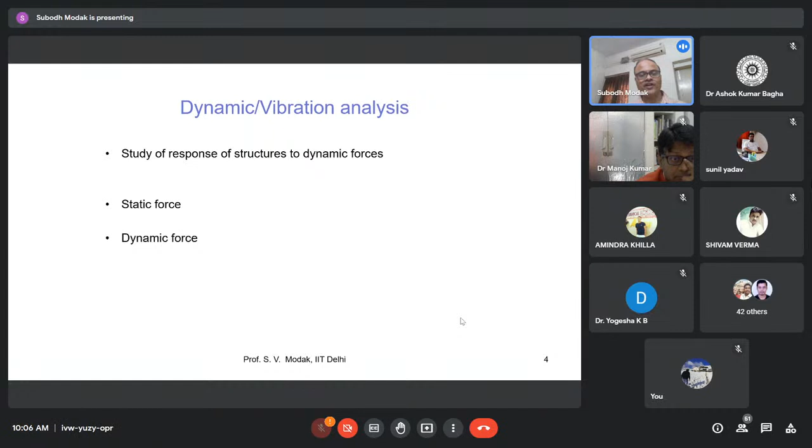But other forces, for example, let us go to the next slide to look at dynamic forces. Different dynamic forces which may act on structures could be due to rotating unbalance. For example, many machines have rotating parts like a motor, an IC engine, a pump, a centrifugal compressor, fans, and so on, with rotating parts like blades. So what happens is there will always be some amount of unbalance present because the center of gravity of the fan or rotating body may not be exactly aligned with the axis of rotation. And because of the difference between these two axes, there would be a centrifugal force that comes into play, which would eventually be transferred to the supporting structure through bearings. Therefore, the supporting structure would be acted upon by unbalanced forces.

This force is of rotating nature because the body is rotating. And therefore, if you look at force in the vertical direction, that force will be continuously varying, because the centrifugal force is rotating and its component would continuously change.

Similarly, there could be reciprocating unbalance. The reciprocating masses, for example in an IC engine, the piston mass is a reciprocating part, and some amount of the mass of the connecting rod basically makes up the reciprocating mass. This reciprocating mass in general cannot be easily completely balanced, and that is then transferred to the supporting structure through bearings, making it an unbalanced force.

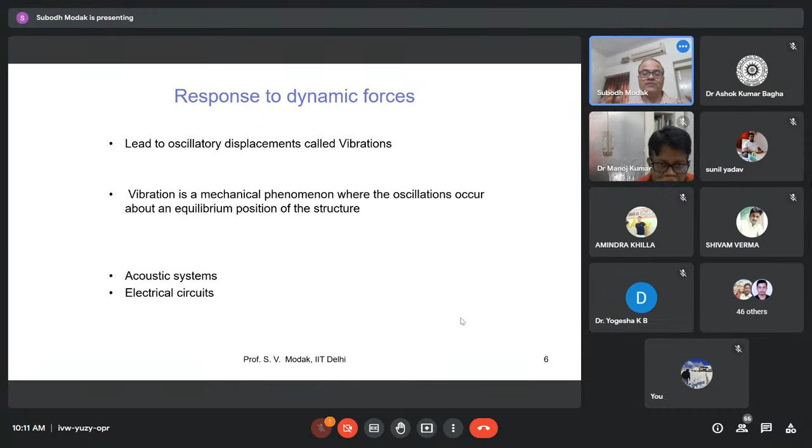So this gives you a brief idea about the different types of vibratory motions. For example, you can have—let me pull out the pointer.

So you can see, for example, an electric motor rotates at a certain RPM, and because of some unbalance, there will always be a rotating unbalanced force. This unbalanced force would be dominant, creating dominant vibration at the frequency of rotation, so it will generally be a harmonic force, and the resulting vibration is a harmonic vibration. If you plot on a time axis x versus t, you would see a curve like this, a sine wave. It's called harmonic vibration.

But if you have a diesel engine, and you put your accelerometer on its surface to measure that vibration and see its waveform, it is likely to look something like this, shown by the green line. This vibration is generally not harmonic, it has multiple harmonics. The fundamental rotatory component will have harmonics of that component. So if the RPM is n, you will have 2n, 3n, 4n frequencies also present in the vibration. That's why the waveform doesn't look like a sine wave, but like a summation of many sine waves. It's called periodic vibration.

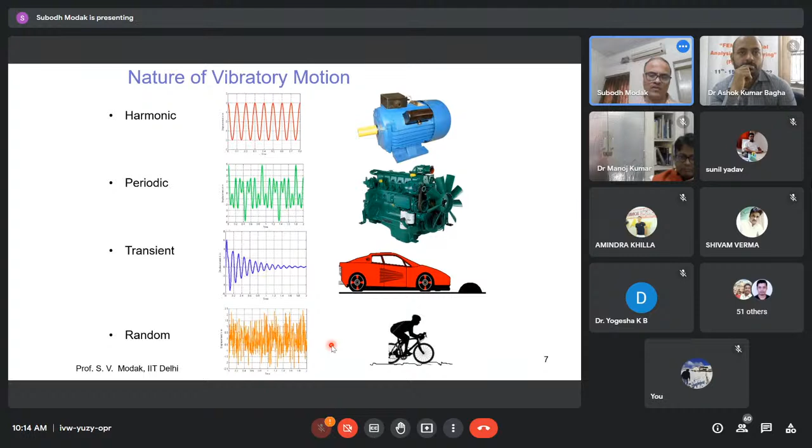So what are the consequences of vibration? If vibrations are there, often they are not desirable, simply because vibration causes an oscillatory displacement, which means there will be strains which occur, and the stresses caused by that will also be oscillatory. And oscillatory stresses cause fatigue. So one important consequence of vibration is fatigue of the material—it is subjected to continuously changing strains and stresses with time, and this causes fatigue. The fatigue life is less than the life without fatigue. If a machine component has no fatigue, it can last for a very long time, but if it is subjected to fatigue, which means oscillatory loads, its life will be less. That is one consequence of vibration: it causes fatigue and reduction in life.

Vibration also causes noise. For example, if a machine is vibrating, you often hear some noise coming out of it. If a fan is switched on, then you hear noise. Any machine, a motor running, you immediately hear something. So that is a byproduct of mechanical vibration, it also causes noise or sound waves, and it causes discomfort.

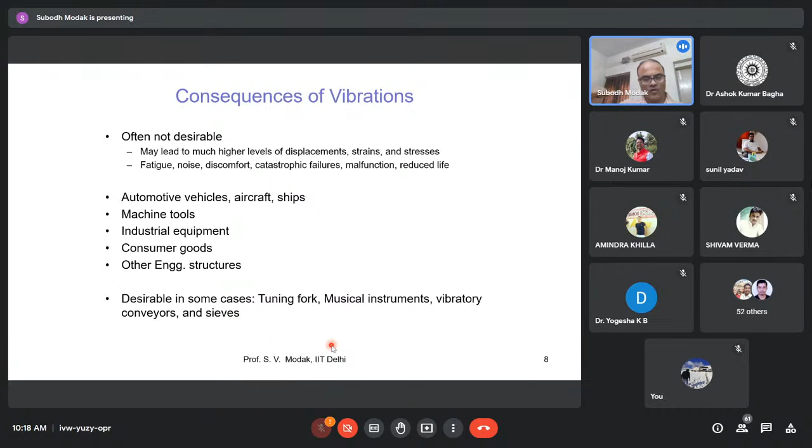So with this background, now we are in a position to understand and address the fundamental question: what is modal analysis? Every structure which vibrates, every physical system which vibrates, has natural modes of vibration. It has some natural modes in which it can vibrate. When you disturb a system under free condition, you just disturb it and leave it, then it will vibrate with some fixed natural modes. It will not vibrate arbitrarily.

So if there is any physical system, you hit it. For example, this desk is there. If I hit it like this, because I'm just disturbing it and then leaving it, this desk or any other physical system would vibrate in some fixed natural modes of vibration. There are some fixed patterns of vibration which it can acquire, and those patterns of vibration are called natural modes of vibration.

So modal analysis is a subject in which we study these natural modes of vibration: what are the natural modes, and we also want to know how the dynamic response is generated through these modes. How is the dynamic response of a structure subjected to dynamic forces generated because of these natural modes of vibration? These are the two objectives of modal analysis, two very broad objectives.

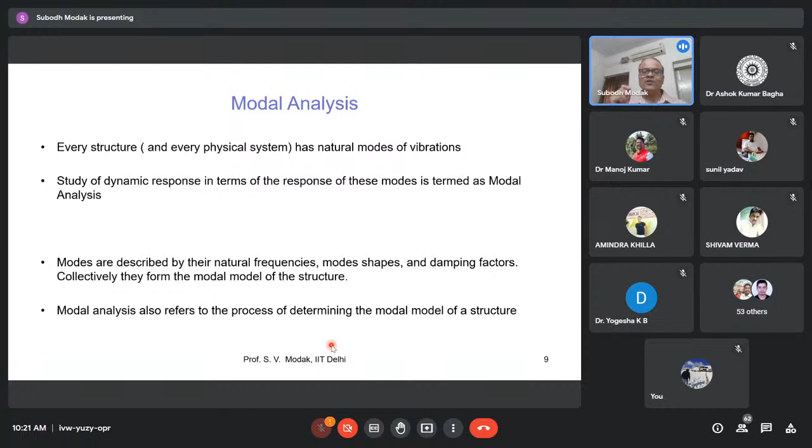But then the question arises, why do modes of vibration need to be studied? Why should we study the modes of vibration? Because we see that most noise and vibration problems are related to resonance phenomena. In practice, when we see a problem, for example in a passenger vehicle, we often see there is a lot of noise inside the car. One of the principal reasons for that could be resonance, acoustic resonance in this case.

It could also be mechanical resonance. If a body is resonating because of the engine forces, then it will release more noise into the cavity. Or consider a machine, for example, a machine generating a lot of noise.

So maybe the casing or cover on top of the machine is being subjected to forces which cause that casing to vibrate in its natural mode, and that is causing a lot of radiation of noise. So there are many examples where resonance is responsible for vibration and noise.

That is why we should study modes of vibration, because when does resonance occur? Resonance occurs when the frequency of the dynamic force which is acting coincides with one of the natural frequencies of the system. If that frequency coincides with a natural frequency, resonance occurs, and at resonance the vibration level becomes relatively much higher compared to when resonance is not there. That is why we should try to avoid resonance.

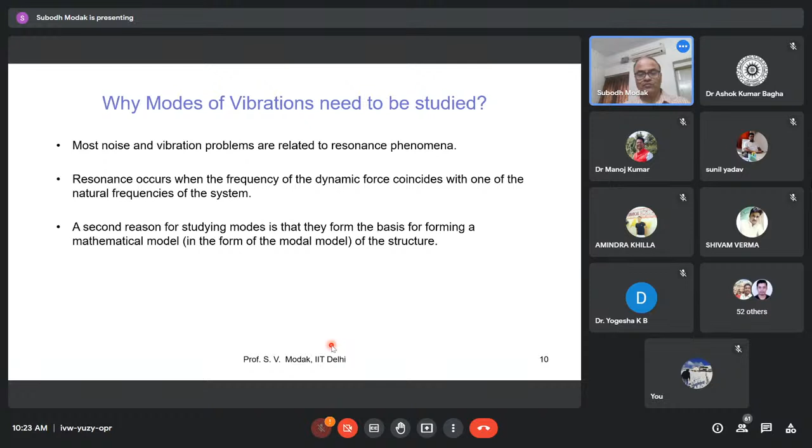So let us go to the next slide. I think now we have explained what modal analysis is. Now we are going to take up the next question: how is modal analysis carried out? How do you do modal analysis?

There are two approaches to modal analysis: one is called analytical modal analysis, and the other is called experimental modal analysis or modal testing. To understand experimental modal analysis, it is necessary to first understand analytical modal analysis, because that understanding lays the foundation for developing the principles of experimental modal analysis. That is why we need to first understand what analytical modal analysis is, and that is what we will do first.

So you will have a force acting in the vertical direction, and of course there will also be a force in the horizontal direction. But if we focus our attention on the vertical direction, then the bracket is going to vibrate like a cantilever beam. To study this phenomenon, how the motor causes vibration of this cantilever, one approach is analytical modal analysis, in which we will first build a model of this system.

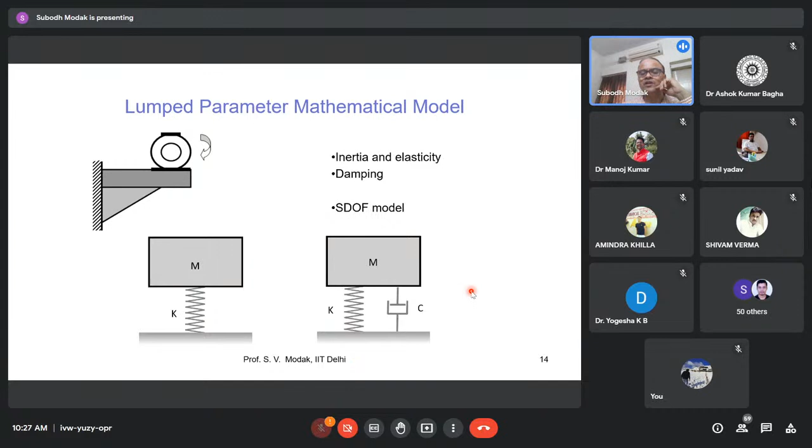The simplest model we can make is a single degree of freedom model, in which we are interested only in one coordinate of motion—the vertical displacement, let us say. So you have just one degree of freedom you are concerned with, and therefore you are making a single degree of freedom model. We can have an undamped model where we ignore damping, or a damped model where we also take into account damping. This is called a single degree of freedom model, and I think you must have studied this earlier.

If you want a more accurate model, more accurate prediction, then you may have to go for a multi-degree of freedom model. For example, for a car, the tire may have some stiffness, and then your suspension may have some stiffness. So if you just represent it by a single degree of freedom model, the predictions may not be accurate enough.

A further way, for example, if you want to study how noise is radiated inside the car—the body of the car is flexible, made of very thin sheets. Because of the flexibility, it has its own modes of vibration, and those modes of vibration radiate sound energy into the cavity, into the cabin of the car. If you want to study that, this 2 degree of freedom model will not be enough, because it doesn't allow us to study how the flexible body of the car is going to vibrate.

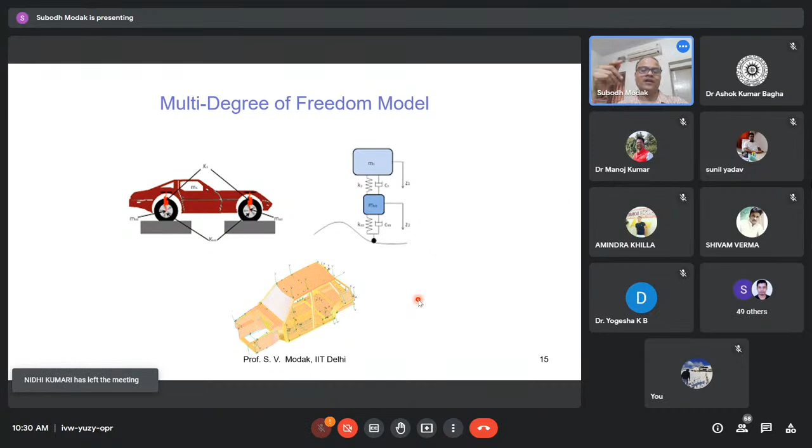So let us now try to understand that once you have a model, whether it's a single degree or multi-degree of freedom model, or a finite element model, all those models finally take the form of equations that look alike. All of them are described by three matrices: the mass matrix, stiffness matrix, and damping matrix. In this case, I have taken the undamped system, so there is no damping matrix. So we can write the equation as m x double dot plus k x equal to 0.

We are trying to study the natural modes. Natural modes are the modes when any system vibrates under free condition, and that's why here we are not including any forces. You can see the right hand side is 0 because we want to study natural modes.

The vibration is going to be at a certain frequency omega, the natural frequency omega. When we substitute this, we end up with this problem, called an eigenvalue problem: k minus omega square m into x equals 0. This is a very important problem. In mathematics, you must have studied the eigenvalue problem.

Anywhere we have this kind of equation, you can see it's not a set of linear equations. There is no right hand term here. In case of linear equations, we have a right hand constant term, but in an eigenvalue problem we have 0 here. So it's an eigenvalue problem.

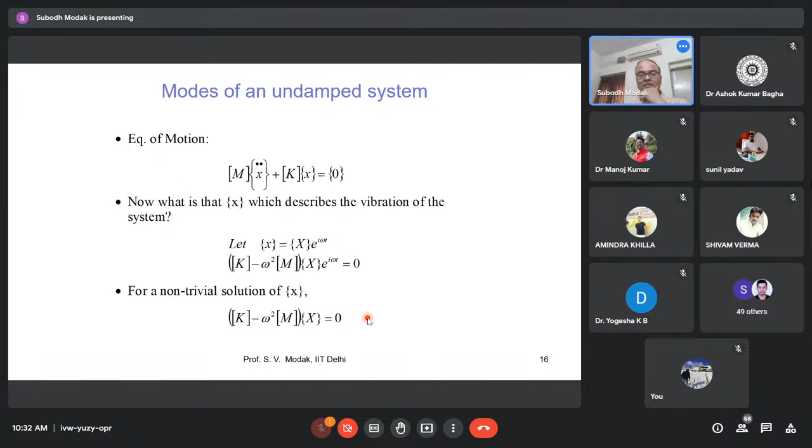So when this problem is solved, we get eigenvalues and eigenvectors. When you solve this eigenvalue problem, because the size of the matrices is n by n, if n is the degree of freedom of the model, then we get n eigenvalues.

It is typically written in the form of a matrix of eigenvalues. All diagonal terms are the eigenvalues, and natural frequency is the square root of the eigenvalues. So if I have an eigenvalue omega 1 square, the natural frequency is omega 1 radians per second. If I want it in hertz, I should divide it by 2 pi, so omega 1 upon 2 pi is the natural frequency in hertz.

So this eigenvector is nothing but mode shape. It tells you what is the relative displacement profile of the system when that system is vibrating at the corresponding natural frequency. So if a system is vibrating at, let us say, the first natural frequency omega 1, then the relative displacement profile of different degrees of freedom will be described by this first eigenvector, and so on.

So I think these are the fundamental properties of the system. Eigenvalues and eigenvectors, or natural frequency and mode shapes, are the fundamental characteristics of the system. They don't depend on the input, what force we are applying. It simply depends on the system.

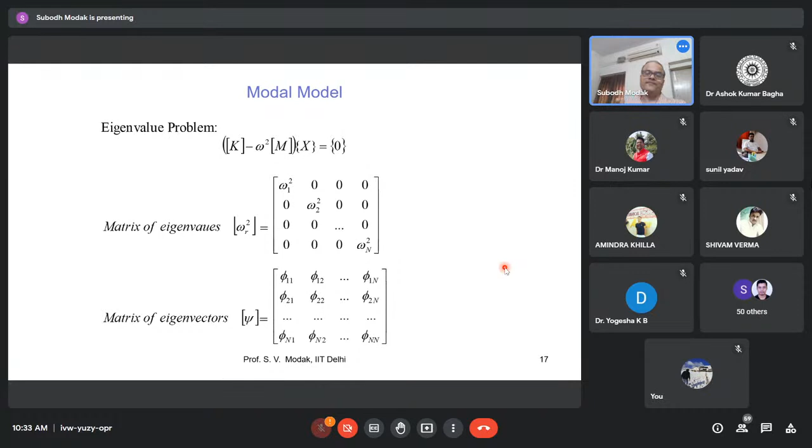So that is one objective of analytical modal analysis, or modal analysis: to find eigenvalues, eigenvectors, or natural frequencies and mode shapes. Generally, in analytical modal analysis, we often start with undamped problems by ignoring damping, simply because it is not easy, or rather, the information is not there to model damping in the models.

So that is why often the software packages, finite element software packages, model the mass and stiffness matrix. But for the damping matrix, you can take a proportional damping matrix, but the problem is what proportionality factors you would take. Based on a pure finite element model, with no other information available, it is actually not possible to model damping. We don't know what the damping is, and that is why through a finite element model you cannot model damping.

The only way you can model damping through a finite element model is to estimate damping factors from experiments like modal testing, and then try to generate or estimate some proportionality factors, and incorporate those proportionality constants into the finite element model. So the finite element software would allow you to model damping, but then the question would be what proportionality factors do you take if it is proportional damping. That is the problem, so therefore they ultimately have to come from experiment.

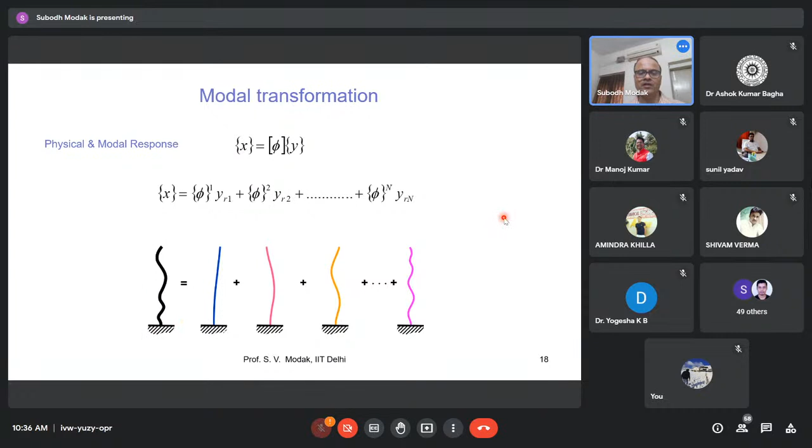But through modal analysis, we can break down this total response in terms of response in different modes of vibration. So this is the first mode of vibration, and this is the response in the first mode. This is the plot of this complete term. Second, this plot is the plot of the second term, and so on. So you can see these are all the modal responses in different modes. And if you sum these modal responses by multiplying them by the eigenvectors, you get a complete physical vector of response. So this is the second aim of analytical modal analysis, to study response in terms of modes.

Now, how do you determine this? I think I will quickly go through this slide, that if we have a force F, how do you analytically study the modal response. So we again do this transformation. We post and pre-multiply by phi and phi transpose. We get modal equations that get decoupled. These are coupled equations, these are decoupled equations, and then we get the matrix of modal responses, vector of modal responses here. Y is equal to kr minus omega square mr inverse fr.

So these kr and mr are the modal stiffness and modal mass. So modal response can be described by a single degree of freedom vibration in each mode of vibration, and each single degree of modal response is characterized by a modal stiffness and modal mass. So this is basically the modal response.

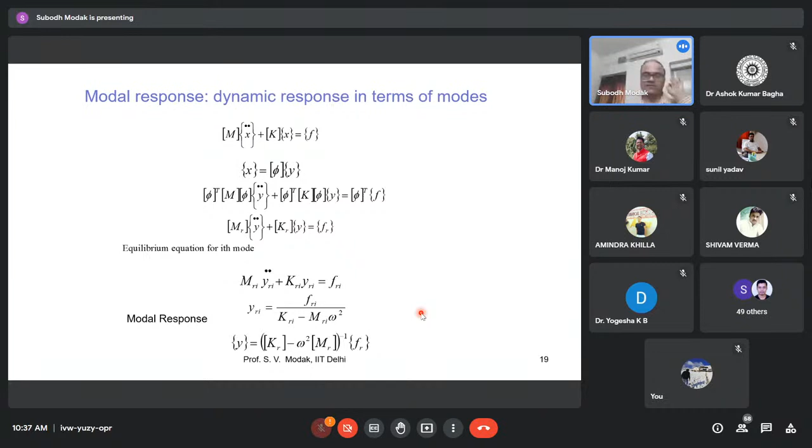So therefore, what do you do in effect in analytical modal analysis? We have a spatial model, a model which is in terms of matrices: mass matrix, stiffness matrix, and damping matrix. This description of a structure or a system is called a spatial model. A spatial model means description in physical coordinates through mass, stiffness, and damping matrix.

And then through the eigenvalue problem, we convert it into a modal description or modal model. This description is in terms of natural frequency, mode shapes, and damping factors. These two descriptions are equivalent descriptions. Theoretically speaking, these two descriptions are completely equivalent, and theoretically, of course, they are true in all respects.

That is true, but for analytical purposes, a complete model might be available, but in experiment, a complete model may not be available. So in theory, it is possible to convert a modal model to a spatial model, and a spatial model to a modal model. So I think this is basically one of the aims of modal analysis, that we obtain a modal model from a spatial model.

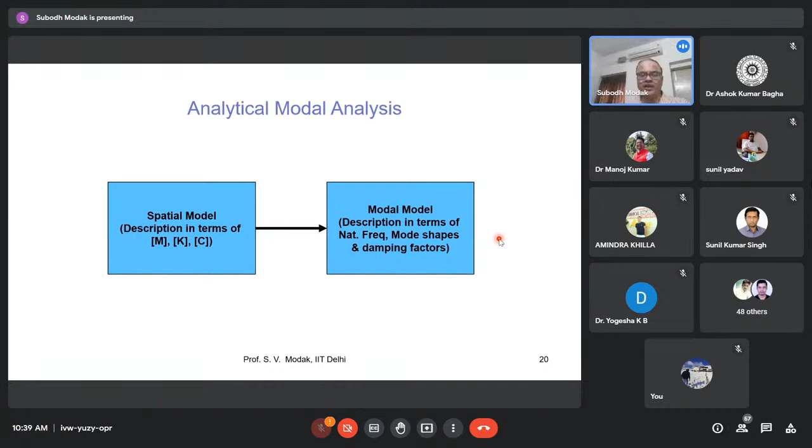So once we have understood that analytical modal analysis is possible, we can develop a mathematical model of the structure or system through either a lumped parameter model approach, a degree of freedom model approach, or a finite element approach. We can develop the mathematical model of the structure, and then we can perform modal analysis. We can study the modes of vibration. We can also study the modal response, etc.

But then, if that can be done, what is the need of modal testing? Why do we need modal testing or experimental analysis? So one of the important objectives of using the information we obtain from modal testing is validation of analytical models.

Because if we have made a model, what is the accuracy of the model and dynamic predictions or analysis done using the analytical model? That is the question. How do you answer that question? If you made a model, and if I ask you, is this model accurate? Is it correct? How do you answer this question?

There is no way. The only way to check this or answer this question is if we have reference data available with us, or data which we can say is accurate. We can compare results of an analytical model with that data, and then we can say whether our analytical model is good enough or not.

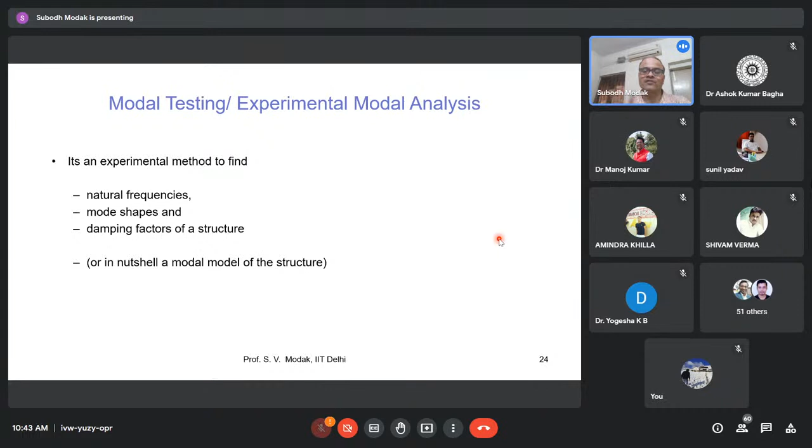What is the basis of modal testing? The dynamics of a structure can be described through three different types of models. One is the spatial model, which you have studied—the analytical model is a spatial model, described in terms of mass, stiffness, and damping matrices. The modal model is a description in terms of eigenvalues, eigenvectors, and damping factors, or natural frequency, mode shapes, and damping factors. The third model is the response model.

What is the response model? Understanding this is important for understanding modal testing. Coming back to the equation we studied on one of the previous slides, the modal response Y is equal to this quantity. If you use mass normalized modes, normalizing the modes with respect to the mass matrix, then the modal mass matrix becomes unity, and the modal stiffness matrix Kr becomes a diagonal matrix of omega r squared. Finally we end up with this equation.

So what we do is find the modal response and substitute it back into this equation, the modal transformation, and then we get the physical response in the physical coordinates x. If you carefully look at the right hand side of this equation, it has two parts. The rightmost part is the force vector F, and the coefficient of this is a matrix.

This whole expression we can call one matrix, and if we represent it by alpha, we can say that this matrix alpha equals phi, omega r squared minus omega squared I inverse, phi transpose. This matrix is called the frequency response function matrix, because it connects physical forces with the physical response.

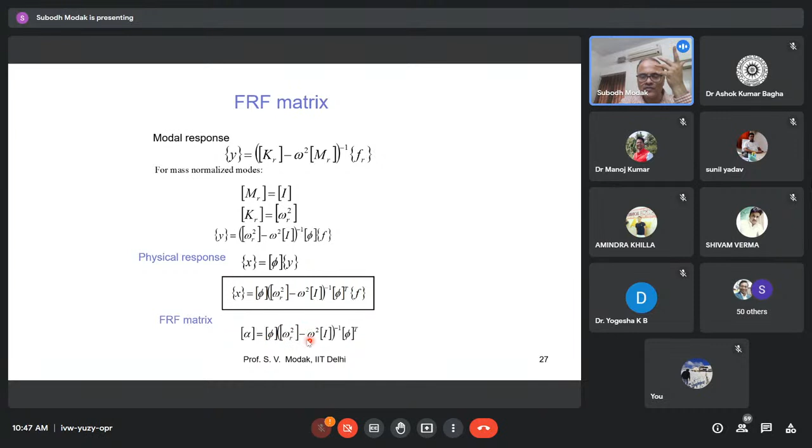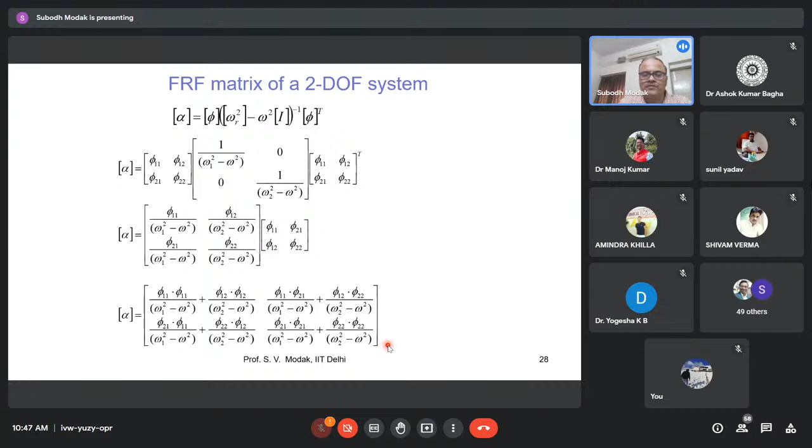Let us go to the next slide. So if I have an n degree of freedom system, if I write down only one of those terms in the FRF matrix, alpha ij, it is written like this. From a 2 degree of freedom system, we can extrapolate and generalize it for an n degree of freedom system.

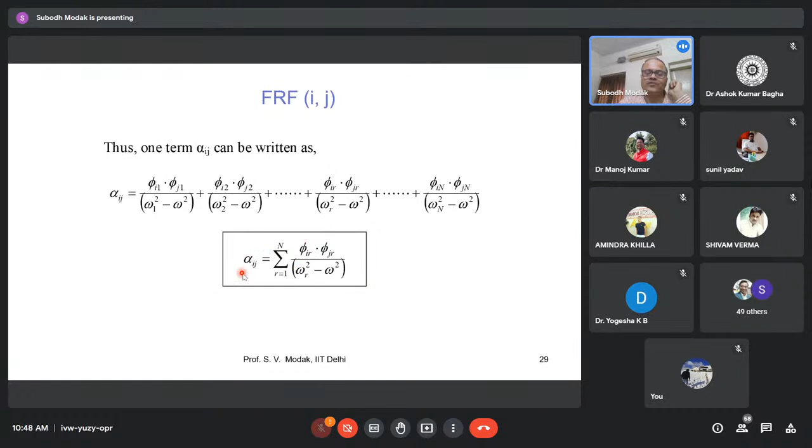On the left hand side, I have the ith and jth element. If I write it in summation form, I have a summation of these terms from 1 to n, where n is the degree of freedom of the system, and each term represents the response of a particular mode of vibration. So this term tells you the response of the rth mode of vibration and how much it contributes to the frequency response function related to coordinates i and j.

So therefore, this is a very important relationship for modal testing. If you look at the FRF matrix of a multi-degree of freedom system, we can represent it in this form: alpha 11, alpha 12 up to alpha 1n, alpha 21, alpha 22, alpha 2n, alpha n1, alpha n2, alpha nn. Since it's an n degree of freedom system, you have n rows and n columns, so there are n times n, that is n squared, number of frequency response functions.

And what is alpha ij? Alpha ij is fundamentally defined as the ratio of the displacement at the ith coordinate at frequency omega, divided by the force fj at frequency omega. Fj omega is the harmonic force applied at frequency omega at degree of freedom j, and the forces at all other degrees of freedom other than j are zero. So you apply force only at the jth degree of freedom at frequency omega, and measure the response at coordinate i at that frequency. The ratio of these two quantities is the frequency response function between coordinate i and coordinate j.

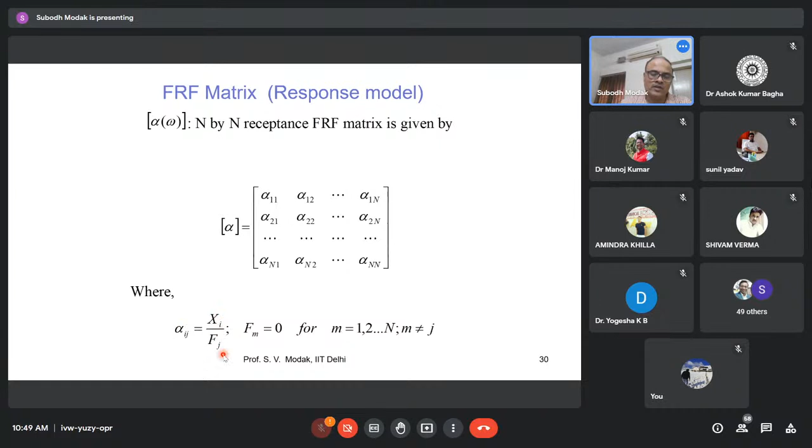So therefore, in modal testing, what do we do? We try to measure the response model. What is a response model? It is a description of a system in terms of frequency response functions. That is an alternative, equivalent description. Theoretically, there is a one-to-one relationship between the response model and the modal model.

The modal model is related to the spatial model. So it means all three models are interrelated and equivalent, in the sense that if you have one model, you can obtain the other two. If you have the response model, you can obtain the spatial model and the modal model. But I would say a word of caution: theoretically this is completely possible, but experimentally there are issues.

You can have a response model, but you cannot get a spatial model from that response model because of the incompleteness of the data. Data is not complete. That's the problem. But the point is that if you have the response model, which is the mathematical description of a structure in terms of FRFs, then it is possible to find the modal model from this, which means we can find natural frequency, mode shapes, and damping factors. Why? Because there is a mathematical relationship between the FRFs and the eigenvalues, eigenvectors, and damping factors.

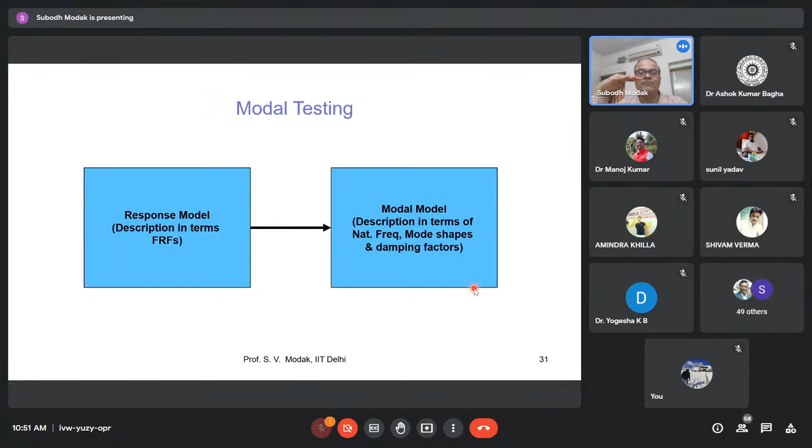So therefore, you can see a system is described in terms of frequency response function, alpha omega, basically alpha ij omega. So alpha ij omega is a characteristic of the system. Now, if you apply some dynamic force F on the system, and the dynamic response is X, then from the knowledge of the input and the output, I can determine what the system is. This is the crux of modal testing.

You are measuring the force you are applying on the structure, and you are measuring the response that it causes. From the knowledge of these two pieces of information, input and output, you are trying to determine what the system is, to which the force was applied and which is causing the response. So this is basically a black box. You can think of the system as a black box. You are putting something into the black box, and something is coming out. If both these pieces of information, input and output, are given to you, then you are trying to answer what lies inside the black box. This is basically what we are trying to do in modal testing.

In electrical engineering, this process is called system identification. They may have an electrical system, and they want to know what the model of this system is. So a similar approach is used: they give some input, let's say a voltage input, they measure the response, and from these two pieces of information, input and output, they try to figure out what this electrical system is, along with its electrical parameters. But in this structural, mechanical case, our interest is to determine the mechanical parameters or dynamic characteristics of the system.

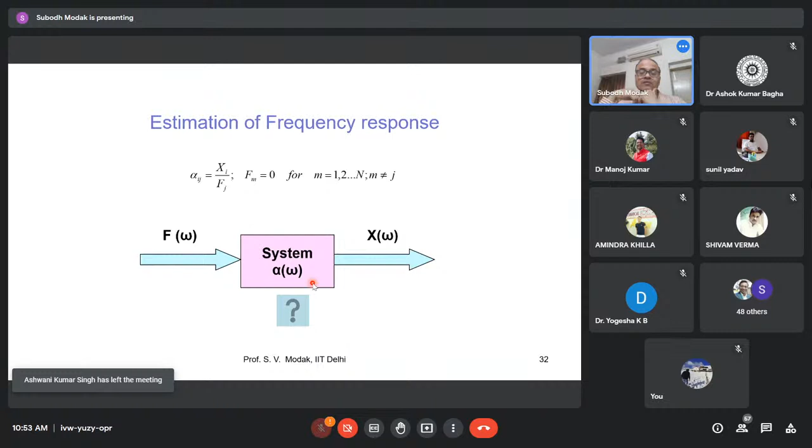This input-output system model is a classic problem in system identification. We are trying to identify what the system is from the knowledge of input and output.

This impact hammer is an instrumented hammer. It has a force transducer at its tip, and wires that run through the body of the hammer, giving you an electrical signal proportional to the force applied. So we measure this force, and then the structure undergoes vibration, which we measure using an accelerometer. The accelerometer measures the acceleration at that point and gives an electrical output proportional to the acceleration.

A few decades back, we only had charge type accelerometers, whose output was in terms of charge. They used to give a charge output proportional to the acceleration, which had to be amplified using a charge amplifier to get a voltage signal. The same was true for the impact hammer output. But now we have what are called ICP type accelerometers and ICP type hammers. These have an inbuilt charge amplifier, a small chip of electronic circuit mounted inside the accelerometer. So you directly get output in terms of the voltage signal, and you no longer require a charge amplifier in those applications. But we may still need a charge amplifier under some situations, especially when the temperature is high.

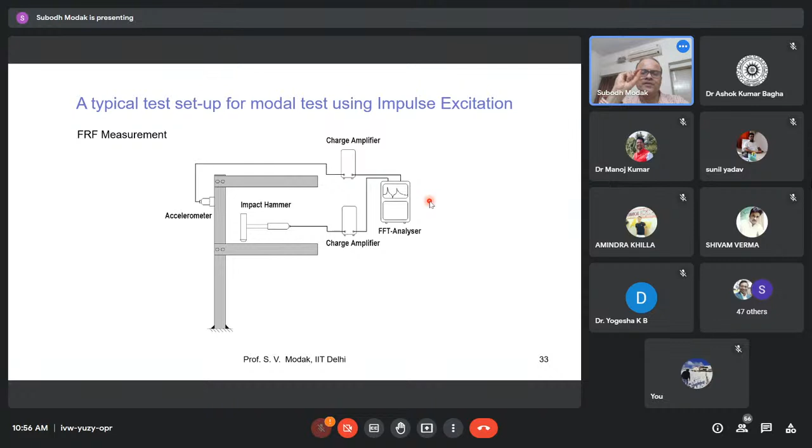So we use an FFT analyzer to acquire the voltage signal proportional to the force, and the voltage signal proportional to the acceleration. These two signals are acquired through a dual channel FFT analyzer, which can then compute the ratio of the Fourier transform of the response signal and the force signal.

Similarly, you have the accelerometers. The accelerometer is a piezoelectric type, using a piezoelectric crystal. It has the property that when it is subjected to strain, it generates charge. That property of the piezoelectric material is used to build accelerometers.

So let us now perform a modal test on a cantilever beam. I have simulated this to show how modal testing is performed. You can see there is a cantilever beam, and for sake of simplicity and explanation, we have taken only 3 points on this. Although 3 points may not be enough to capture higher mode shapes, let us take only 3 points for sake of description.

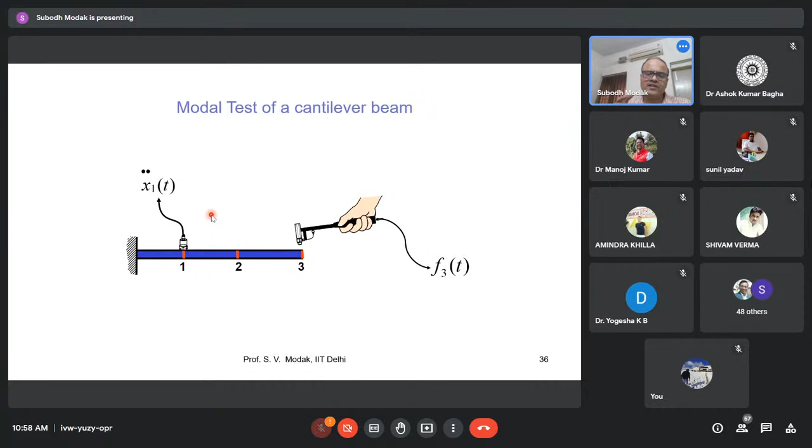So what we get are two time domain signals: one is the force signal f of t, and the other is the acceleration signal. Although I have represented it here through displacement, you will actually get acceleration through an accelerometer. These time domain signals are captured in the FFT analyzer, which has an inbuilt routine to calculate the frequency response function.

The FFT analyzer will first calculate the Fourier transform of the acceleration or displacement signal, using the definition of the Fourier transform. So we go from time domain to frequency domain. We describe a signal as the summation of different harmonic components, and then we plot the magnitude and phase of these harmonic components as a function of frequency - that is nothing but the Fourier spectrum.

And then we also do a Fourier transform of the force signal like this, and we take the ratio of the two: the displacement or acceleration Fourier transform divided by the force Fourier transform. This ratio is nothing but the frequency response function. So this is how we calculate it for a transient acceleration and force.

A hammer, what does it do? It applies a momentary impulse. That is nothing but a transient force - a force which is there for a short duration of time. So that is a transient force, and therefore for transient force we can use these relationships to find the frequency response function.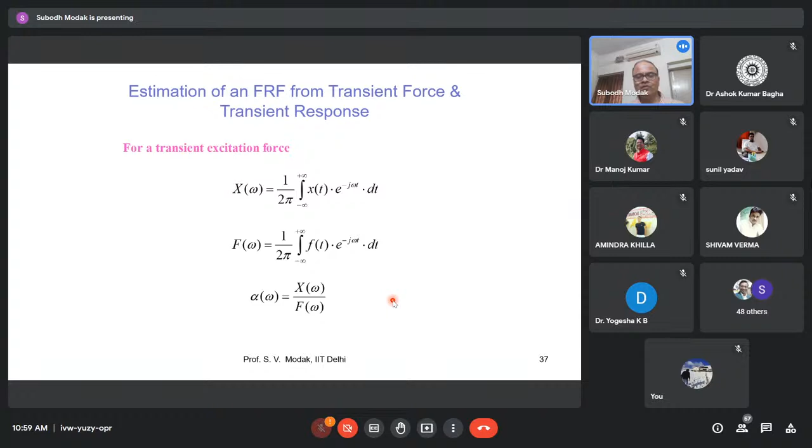Now, using this definition, we will calculate the Fourier frequency response function, and see what data is required for performing modal testing.

So let us see. We have mounted our accelerometer here at test point 1, and we are applying force at test point 3. So we get force F3 and response X1 double dot, which is the acceleration, the transverse acceleration at point 1.

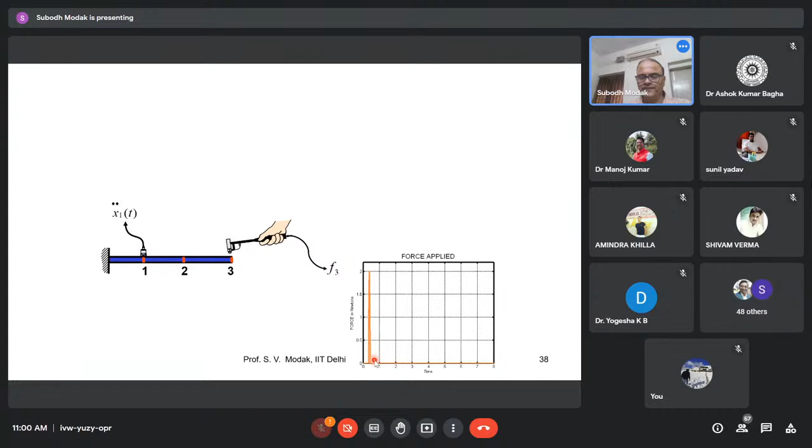So the first thing is the force we are applying. If we plot this force with respect to time, we see a big peak, which represents the impulsive force being applied. The force rapidly increases to a large value and then rapidly drops as soon as the hammer is withdrawn.

We also capture the acceleration, and that response will be a decaying signal because the cantilever vibrates and has damping. The energy given initially by the hammer impact is fixed, and no more energy is added, so it gradually dissipates. Because of that, the amplitude of displacement and acceleration gradually reduces, and when the complete energy is dissipated, the response becomes zero.

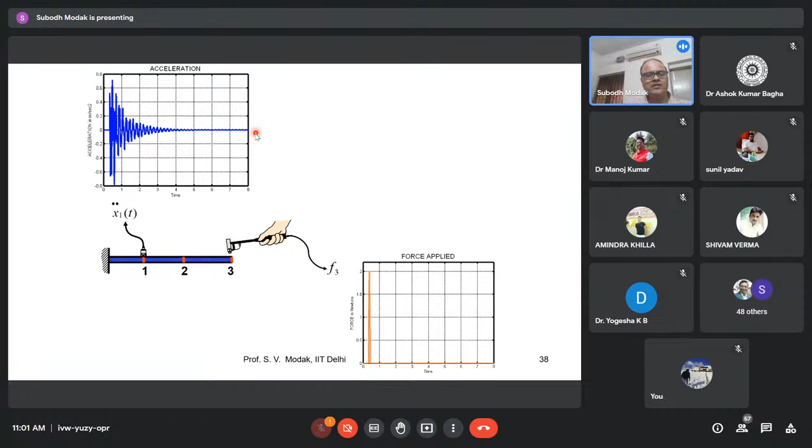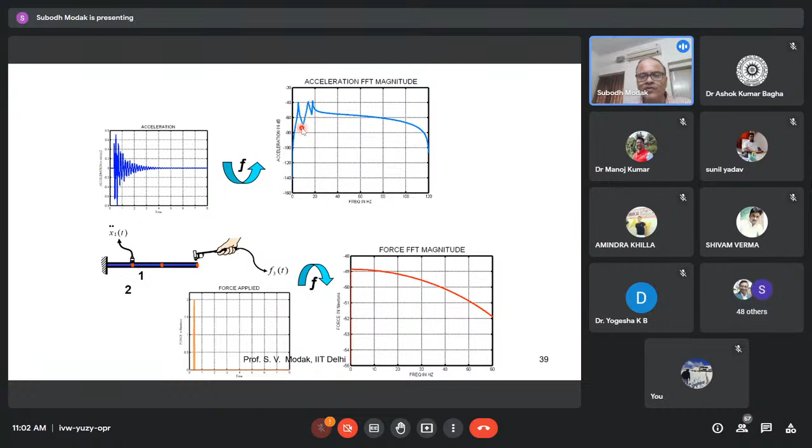Then we also do a Fourier transform of the acceleration signal, and we get this spectrum showing that acceleration is very large at this frequency, again large at this frequency, very small at this frequency, and so on. This is the magnitude of the Fourier transform of the acceleration signal. The next thing is we need to find the acceleration frequency response function.

This is called inertance in the language of modal testing - the frequency response function based on acceleration, represented here by A13. It says: response at node 1, or test point 1, when the force was applied at test point 3. This is what we get - the magnitude of A13 shown on the y-axis as a function of frequency, and this is the frequency response function.

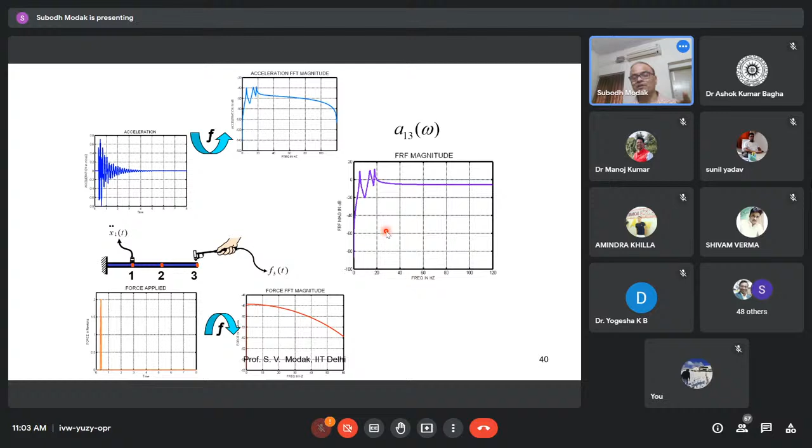So A13 basically characterizes the system behavior between test point 1 and test point 3, or to be specific, between the translational degree of freedom at node 3 and the translational displacement at node 1. A13 characterizes the behavior of the cantilever between these two degrees of freedom, and it's not a complete system description.

Now, because we want information on all 3 points, we change our point of application of force to the other point. Now we are applying it very close to 1 - almost at 1, although since the accelerometer is mounted there, it's physically not possible to apply force exactly at that point. So practically, we apply force just next to the accelerometer, assuming that point is more or less the same as point 1.

So what happens? Through the same process, we get this frequency response function, shown here as alpha 1,1 - FRF 1,1. The top graph is the magnitude of the FRF, and the lower graph is the phase of the FRF. This phase graph tells you the phase difference between the acceleration signal and the force signal - the relative phase between X and F, which is also very important.

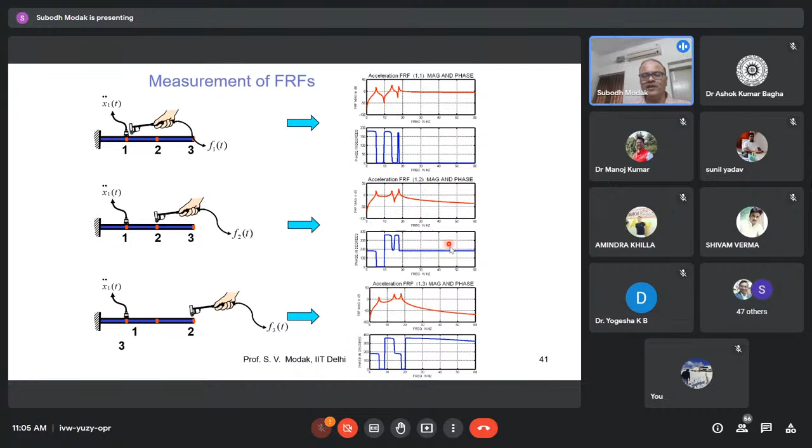Next, we apply the force at point number 2, and we repeat this process, which gives us another FRF. This time it's designated alpha 12 or A12, meaning the response at point 1 when the force was applied at point 2. Earlier we had the response at point 1 when the force was applied at point 1, and this gives us A13. So in this way we have got these 3 FRFs.

Let us go to the next slide. If I now change the position of the accelerometer, on the previous slide it was fixed at point number 1, but if I move it to point number 2, I will get 3 more FRFs. When accelerometer was at position 1, we got alpha 11, alpha 12, and alpha 13. At position 2 we'll get another 3. And if we move the accelerometer to point 3, we'll get alpha 31, A32, and A33.

So by having FRF measurement at all accelerometer positions with force applied at all positions, we have measured the complete FRF matrix with respect to those 3 degrees of freedom, only translational. We have not taken other degrees of freedom because we are interested in system behavior with respect to translational coordinates.

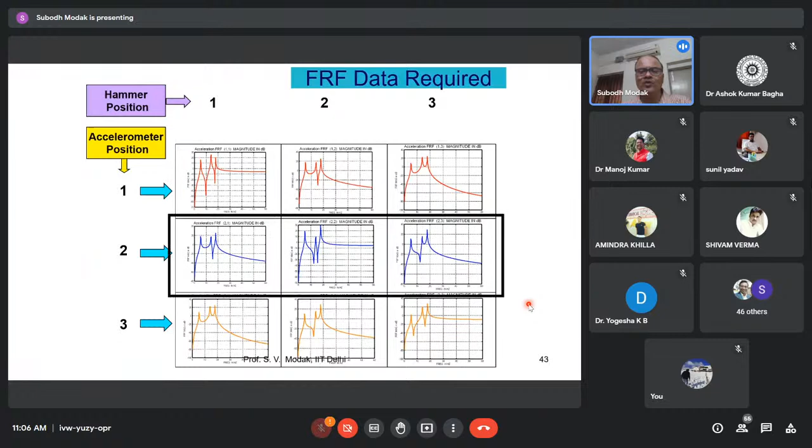So we have measured the full 3 by 3 FRF matrix, but it can be shown that we don't require this complete FRF matrix. We don't need to measure the full matrix. We need to measure either only one row, or one column, in order to determine the model from these FRFs. So in practice, we measure only one row or one column.

One measurement of one row, what does it mean? If I go back to the previous slides, to measure the first row it means I fix the accelerometer position at node number 1 and then move the hammer from position 1 to position 2 and position 3, measuring FRF each time.

The other way is to measure one column, where I need the accelerometer position changed each time from position 1 to 2 to 3, keeping the hammer position the same. When a hammer is used for applying forces, it is easier to move the hammer position since we just move it to a different place. But changing the accelerometer position is more difficult because we have to unmount it and remount it, which may require gluing the accelerometer or creating a small hole and using a stud to mount it.

Generally glue mounting is preferred because we don't want to damage the surface. But in some structures where we want accurate data, we may have to make a small arrangement to mount a stud there. So we generally try to go for a roving hammer test. Roving hammer means we rove the position of the hammer while we keep the accelerometer position fixed.

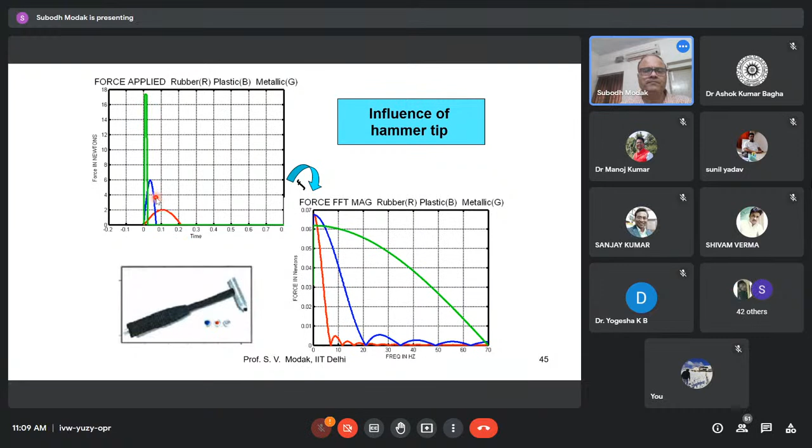The hammer comes with different tips, and I'm trying to show you what is the effect of hammer tip on the FRF measured. If I take the Fourier transform of these impulses generated by 3 different tips, this green one is the metallic tip, blue one is the plastic tip, and the red one is the rubber tip. So we see that the rubber tip, the red one, its Fourier spectrum is something like this.

So the energy reduces very fast as we go from lower to higher range. In blue, the width of the spectrum is a little bit higher, while for the green, it is maximum as compared to the other two, right?

So what happens is that stiffer the tip, larger is the frequency range you can excite. Softer the tip, smaller is the frequency range you can excite.

Why? Because if I use a rubber tip, say the red one, then after, let us say in this particular case shown, after say 6 or 7 hertz, you don't have much energy in the force, so you cannot excite the structure in that frequency range. But if I look at the green one, it has got a good amount of energy almost up to 50 hertz, and therefore I can impart the structure energy from 0 to 50 hertz. However, with the red one, I cannot excite the structure beyond 6 or 7 hertz, right?

And that's why, depending upon the frequency range I want to excite and the range in which my interest lies in studying the dynamics of the structure, I must use an appropriate tip for excitation.

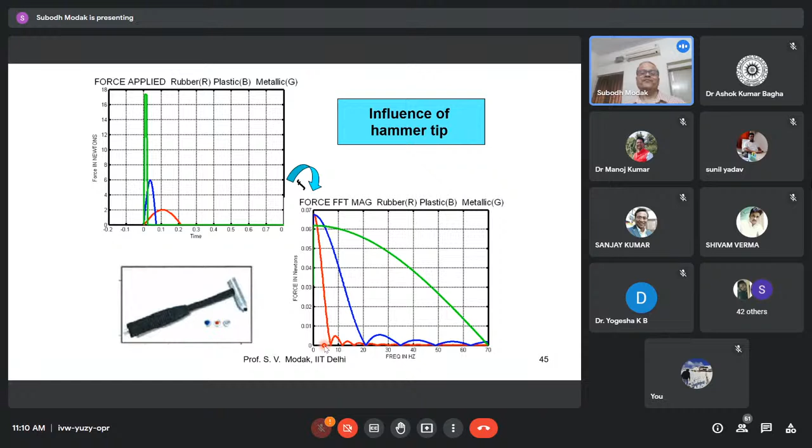So another method to excite or perform measurement is using shaker excitation. This is the setup using shaker excitation. You can see here, again, I have the same cantilever and the accelerometer, but now no longer we use the hammer. We are using a vibration shaker, or what is called a vibration exciter. Often we use an electromagnetic exciter, and in the picture what is shown is an electromagnetic exciter. The electromagnetic exciter works on the principle of Faraday's laws of electromagnetic induction.

There is some noise. Yes. Hello. Yeah, now it is fine, sir. Yeah, okay.

So the electromagnetic exciter, what does it do? It has got a coil, it has got a core, an iron core, a soft iron core, and on that the coils are wound, and that is placed in the magnetic field. When we supply alternating current to that coil, because it is placed in the magnetic field, it experiences a force called Lorentz force. That Lorentz force is again alternating because the current is alternating, and therefore it excites that coil. That coil is supported on a soft suspension, and then that coil vibrates.

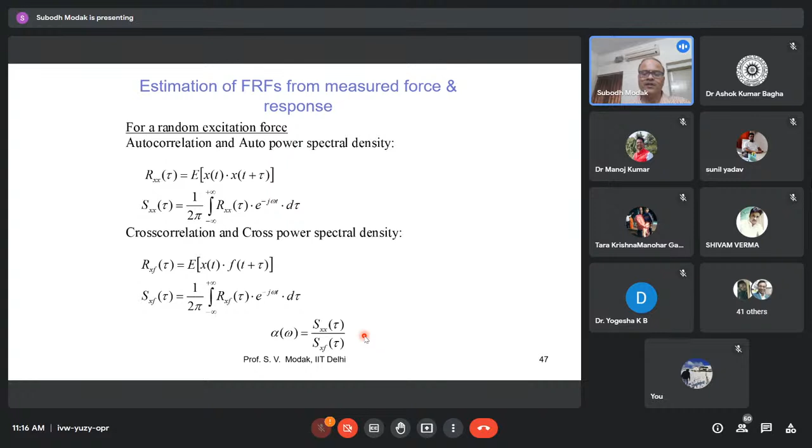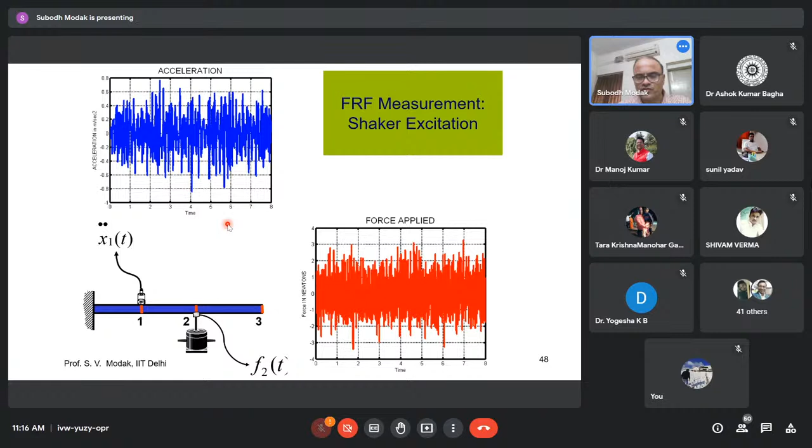Let us again go through the simulated process of FRF measurement through random excitation. We apply a random force — this is the force versus time, F of t, applied by the exciter. This is the response versus time, the random acceleration we are getting, and then we perform FFT.

We find the FFT of the force and the acceleration, and through FFT we determine the autospectral density, SXX, between the X and X signal. It is obtained by averaging the FFT of the response signal, multiplying it by its complex conjugate, and then dividing by the number of records. So we have to take a large number of averages.

So the higher the number of averages, the better the estimate of the frequency response function. In this way we get essentially the same result, and ideally we should get the same FRF as we got from hammer testing. So these are the two alternative methods of measuring the FRFs.

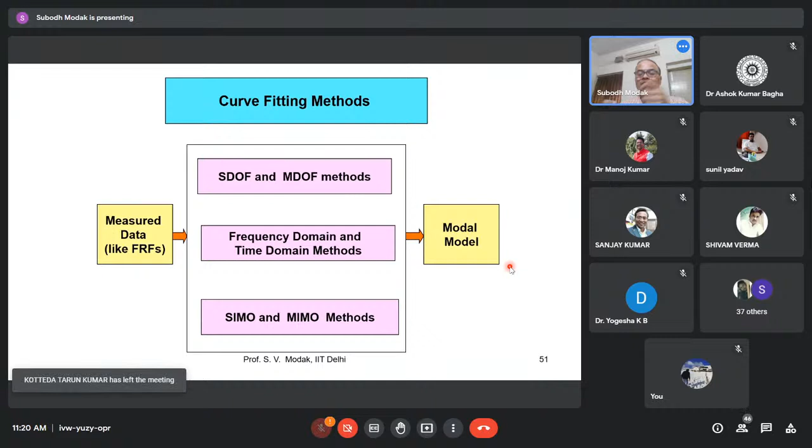So let me explain what the single degree of freedom method does. They assume that around a particular peak in the FRF, the response is contributed only by one mode. That is basically the basis of the single degree of freedom curve fitting method. They assume that the response is contributed by only one mode of the structure. But in reality, not only one mode, but all the modes contribute to the response, or make contribution to the FRF at all frequencies. At this frequency, although the contribution of mode 2 is maximum, the contributions of mode 1 and mode 3 are also there, although they may be small.

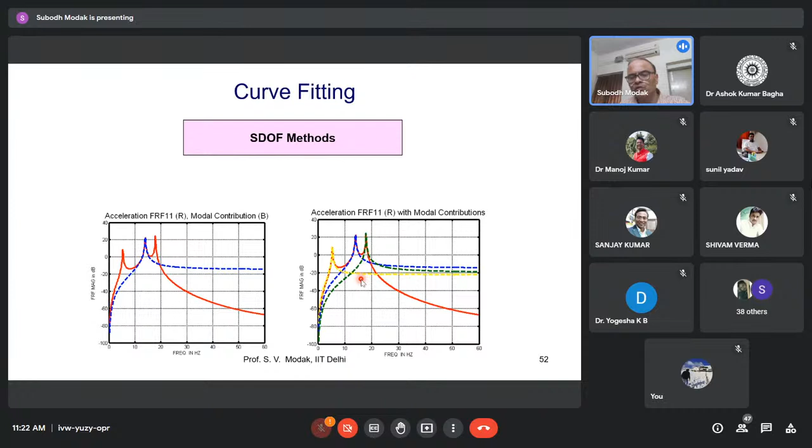Based on this assumption, they perform curve fitting, and such methods are called single degree of freedom methods. Let us look at one such method, called the peak picking method. It is probably the simplest method in curve fitting in modal analysis. The idea is to give you a sense of what this curve fitting is, what you do, and how the output comes in the form of a modal model. So let us take this FRF11 and try to see how we can do curve fitting using the peak picking method.

In the peak picking method, the natural frequency is taken as the frequency of the peak in the response. So let us say that frequency is F1. So we say that the natural frequency of mode 1 is F1, mode 2 is F2, mode 3 is F3. We can read that from the x-axis.

In this way, we get the natural frequencies for these three modes. How do you find the modal damping factor, or damping factor, for all the different modes? We use the concept of half power bandwidth.

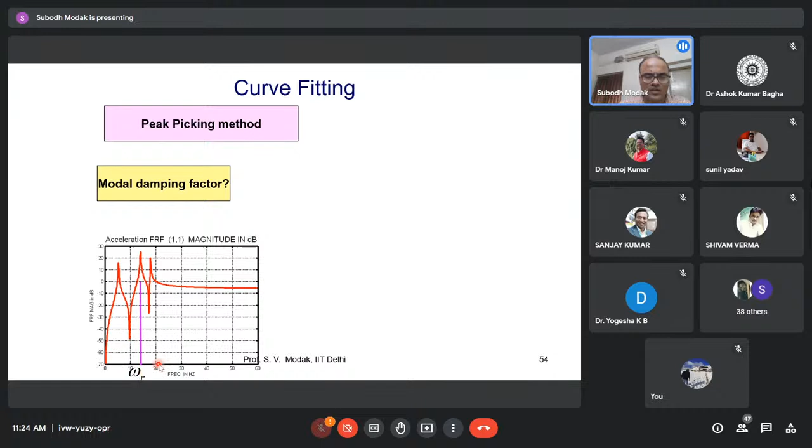Let us say the frequency of mode 2 is omega, this is the frequency in radian per second. On the previous slide I showed it in terms of hertz, that's why that was called F1, F2, F3. This is the natural frequency in radian per second of mode 2. And then we look at this. If I zoom this part, then this is the zoomed part of the range around mode 2.

And then we determine the half power bandwidth, right? Which means, what are the frequencies where the magnitude of the FRF is 3 dB less than the peak magnitude? You can see at the peak frequency omega r, the magnitude of the FRF is 20 dB, and 3 dB down is the 17 dB line.

Now what are the frequencies at which this line intersects the FRF, right? You can see these frequencies are omega 1 and omega 2. So these are the frequencies where power is half in absolute terms, and in dB terms this is equivalent to a 3 dB drop in power. And that's why we have found these frequencies, omega 1 and omega 2.

Then we find the damping factor, or what is called the loss factor in case of structural damping, as eta r equals omega 2 minus omega 1 upon omega r. This is nothing but the estimate of the modal damping factor for mode number 2. In this way, we find the modal damping factors for the first, second, and third modes by this technique. So in this way the damping factors become known.

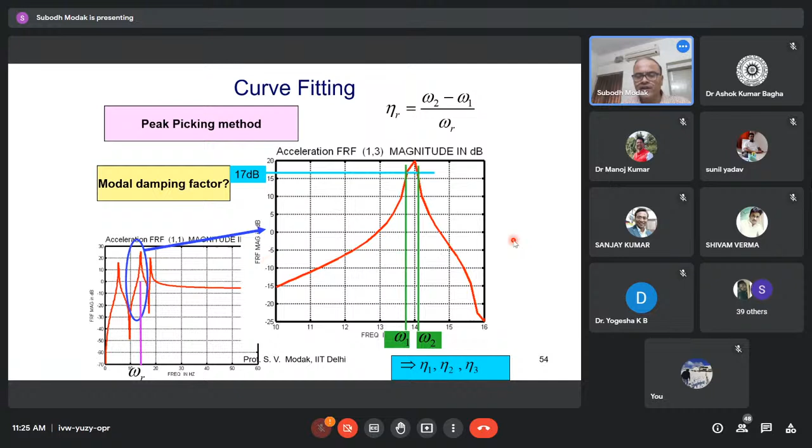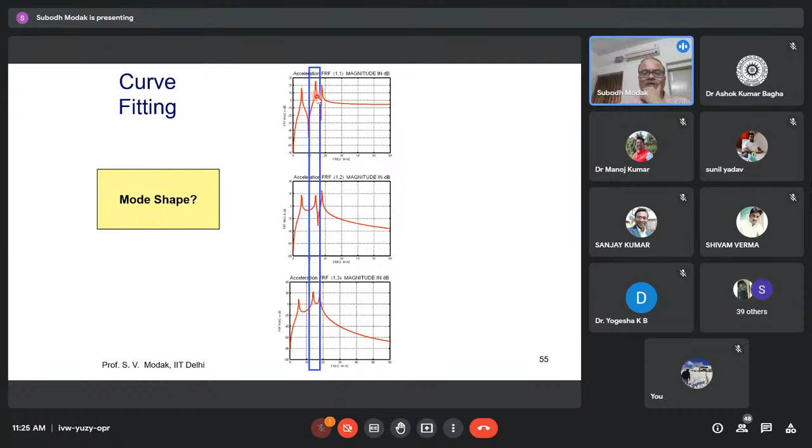Then how do you find the mode shape? For mode shape, let us look at mode number 2. Let us focus our attention on mode number 2, which means we are focusing on the second peak in each of these three FRFs. You can see we are focusing our attention there.

Now if I go back to that expression for the FRF, you can see this was the expression we derived earlier, and here I have included damping terms also, although on that slide we didn't have the damping term. Now if you focus on the second mode and assume that the contribution of mode 1 and mode 3 is negligible, then I can write this expression approximately using only the second term here.

And since I now know the natural frequency, if I substitute omega equal to omega 2, this term goes away. I've already substituted omega is omega 2 here, you can see, and then since I know the left hand side, the FRF, and I know the denominator, the numerator becomes known to me. From here then I can find out the numerator.

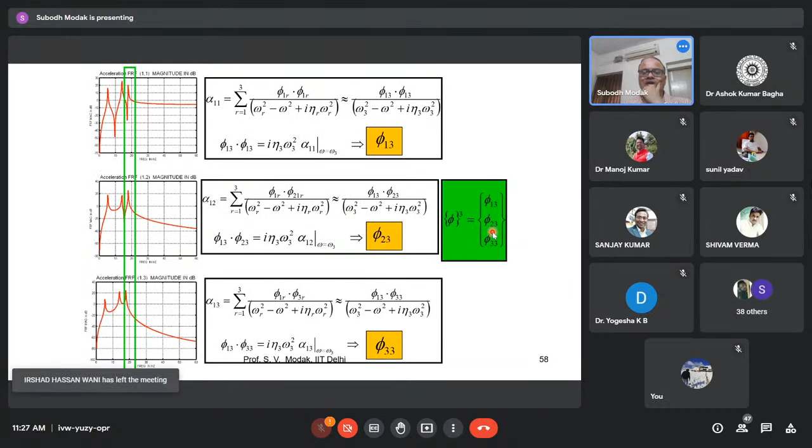So in this way I do it for the first mode, and then I repeat this procedure for the third mode. So in this way the full model becomes known to me. Okay, I think it's 11:27, maybe some more time will be spent and then we'll stop.

In multi-degree of freedom methods, what we do is that instead of fitting one mode at a time, we fit multiple modes at a time. And therefore these methods are supposed to give a more accurate estimate of the model, because that is the reality - all modes are contributing at all frequencies. So assuming a single degree of freedom contribution is not a correct assumption, and that is why multi-degree of freedom methods can give better estimates. But they are, obviously, computationally and mathematically more complicated.

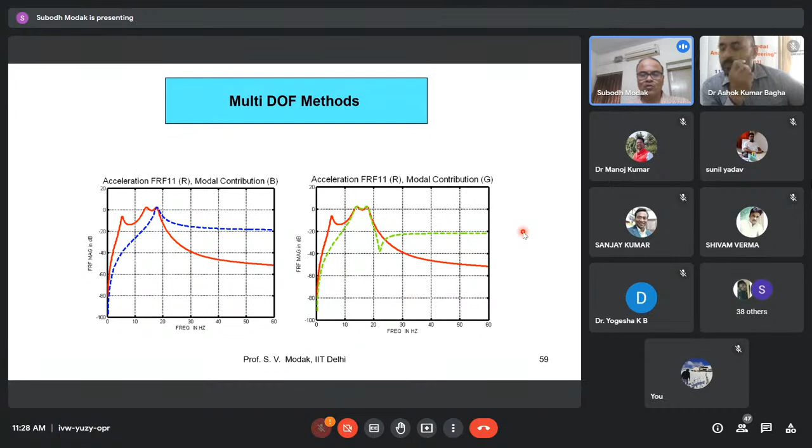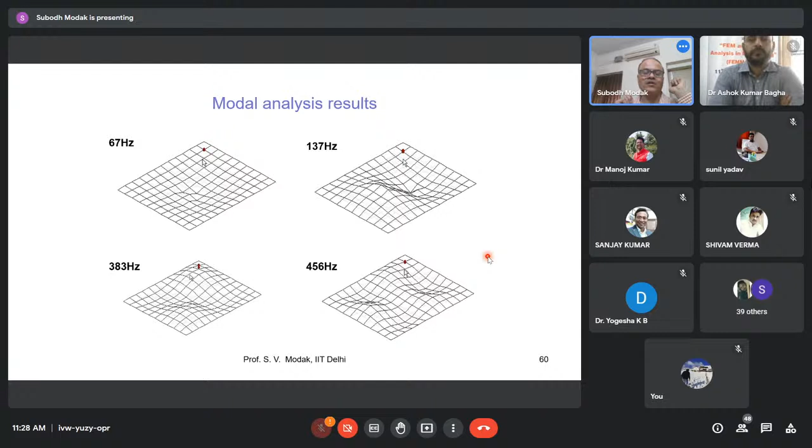We will also get damping factors from this. You can see these are identified experimentally, not from using a numerical model or any mathematical model. We have found it from experiment. So that is basically the output of the modal analysis. In this way, the modal testing has permitted us to find independently, experimentally, the natural frequency, mode shapes, and damping factors.

Now, what are the applications of modal testing? Let us spend some time to understand what are the applications. One of the most important applications of modal testing, apart from having an experimental estimate of the natural frequency, mode shapes, and damping factors, that knowledge itself can be used to avoid resonances. That is one clear-cut application. We can use that data for troubleshooting.

For example, if a structure has a lot of vibration, through modal testing we can come to know what are the frequencies. If there are some motors or machines mounted on the structure, we can determine what are the operating frequencies of that equipment. Then we can see whether those frequencies coincide with any of the natural frequencies we identified through modal testing. So modal testing can help us figure out if there are any problems, and we can try to diagnose the root cause of the vibration using the knowledge we get from modal testing.

So that is one application of modal test results, to perform diagnosis of noise and vibration problems. We can do diagnosis or troubleshooting of noise and vibration problems using modal testing data.

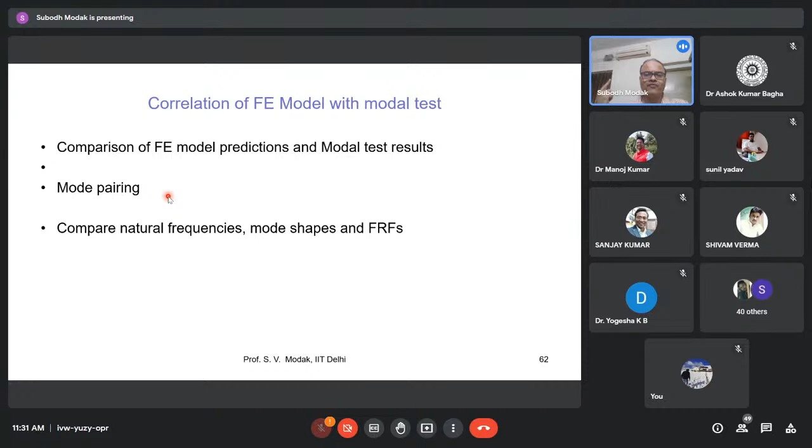So the first step, therefore, is what is called mode pairing, and that is done using modal assurance criteria. We use modal assurance criteria for mode shape pairing. What does it do? Modal assurance criteria is a mathematical tool, or mathematical expression, to quantify correlation between experimental and FE model mode shapes.

So if we have, let us say, n number of modes—for example, in this case I have shown the figure for 7 FE model modes and 7 experimental modes, so 7 by 7. I can take one mode from the FE set and one mode from the experimental set, and correlate them to see how close they are. That is nothing but the modal MAC value for that pair of modes. So if I have 7 modes from FE and 7 modes from experiment, I can have a 7 into 7, 49 number of MAC values.

And these 49 values can be expressed in the form of a matrix called the MAC matrix, a 7 by 7 matrix. Generally, the maximum possible value of this MAC number between two modes can be 1, and the minimum value can be 0.

If it is 0, that means there is no correlation between the ith mode from the experiment and the jth mode from the analysis or the FE, right? And the value of 1 tells you that they are exactly matching. That's what the MAC correlation says, and that's why MAC is a very powerful tool to correlate modes.

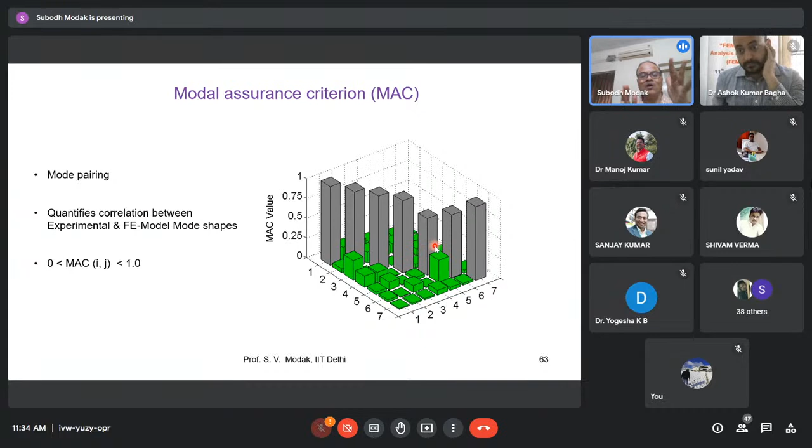Now there could be sources of discrepancy between FE model predictions and modal test results, like inexact values of material properties being used in the FE model, because there are several modeling approximations and idealizations that might be there in the FE model. Like boundary conditions are an issue, how to model boundary conditions. In the FE model we may idealize them. There will be some problem with joints, how to model joints. Often in the FE model the joints are modeled in a very simplified way. The geometry is often simplified because the actual geometry may be complicated, so sometimes we may do some idealization there.

Damping is a problem because in FE we don't know what damping data is to be used, so that has to come from experiment. And discretization error is another issue in the FE model, but that can be easily eliminated by using a very fine mesh, so that is generally small and negligible and can be ignored. But we must be aware that discretization error is also possible if one is not careful in discretizing the FE mesh properly.

So that is why the updating of FE models is another important application of modal testing results. Here what we try to do is determine the uncertain parameters in the FE model based on modal test results. We can update those parameters and try to get a better estimate of them. It is a very well established field, and in many industries validation and updating is an important step in the whole dynamic design cycle.

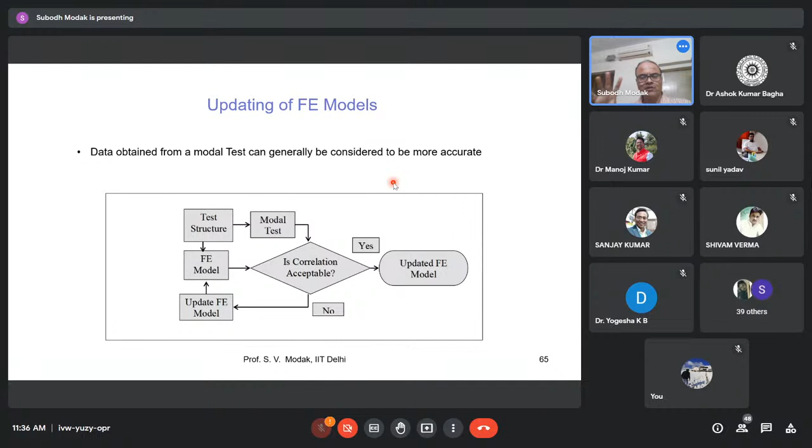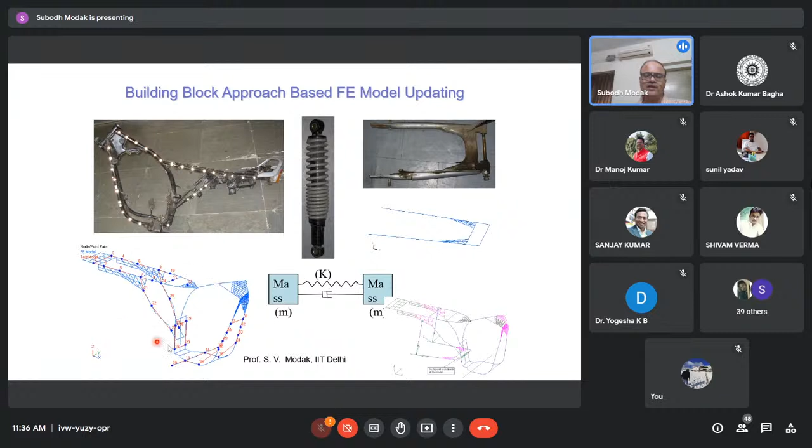It's an important step, and our students have done several studies on this application of modal testing. For example, we have developed a building block approach to FE model updating, where we try to develop a validated model for individual components of a motor vehicle frame. You can see the motor vehicle frame, suspension, and other members, all validated separately, and then combined, and again the combined assembly of all these components was validated through modal test results.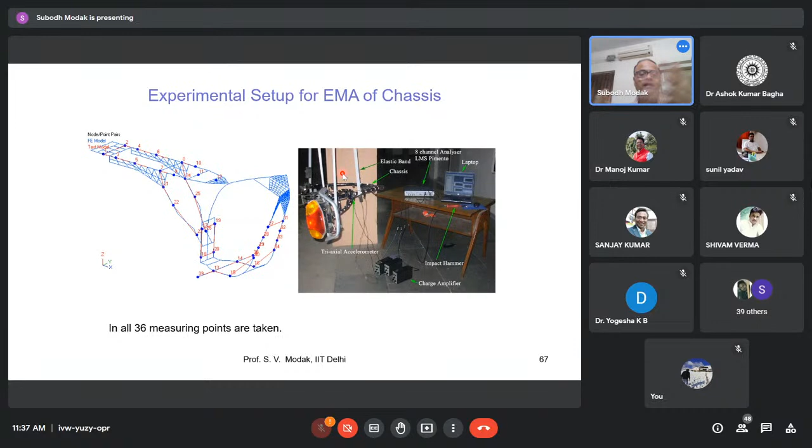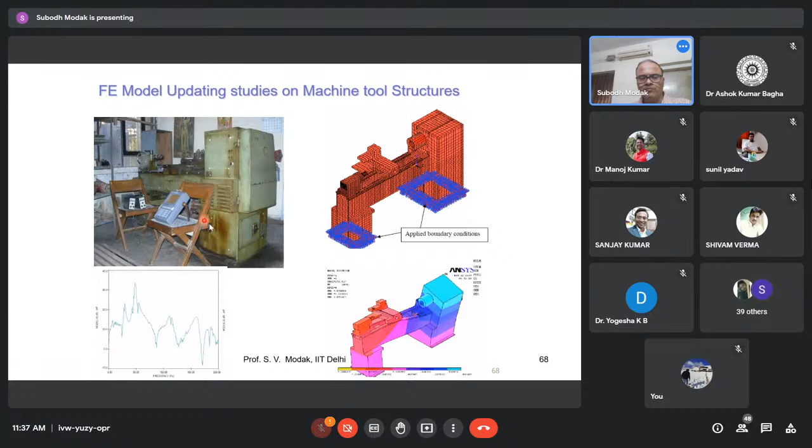This is a model updating exercise on a lathe machine in our workshop. We developed the FE model, performed measured FRFs on this, and then did the correlation and validation exercise.

On rotating structures also we have done studies.

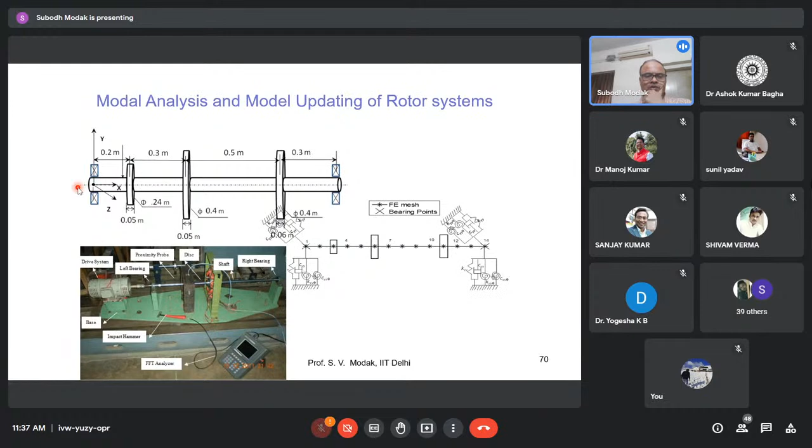Using multiple excitation points, a better estimate of the model can be obtained, often called poly-reference techniques of modal testing. So that is one application of modal test in the aircraft industry, where they do a ground vibration test, perform modal testing, measure and identify the modal model of the aircraft, and then validate the finite element model using those results. That is the first level of testing.

That is the first test done on the ground. But actually, aircraft has to fly, and then there is another level of test being done, which is in-flight modal testing. That also has to be done.

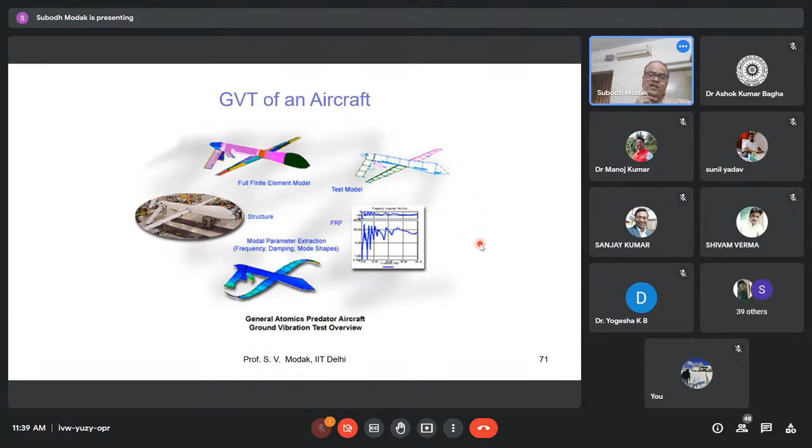So there is an important phenomenon called aerodynamic flutter. Aerodynamic flutter is unstable oscillations of the aircraft wings. The wings oscillate, and it is seen that the vibration of the wings can become unstable, meaning the vibration level or amplitude of the aircraft wings may increase with time or with speed. That is instability.

It is seen that at certain speed, the vibration amplitude of the aircraft increases with time, meaning the vibration is becoming unstable, and that is dangerous, because if the vibration is increasing, the wings will fail, causing a catastrophic failure.

Why does aerodynamic flutter occur? It occurs because of the interaction between the structural dynamics of the aircraft and the aerodynamic forces. When the aircraft flies, there is a fluid, the airflow, and the airflow generates aerodynamic forces. So the interaction between the aerodynamics, the fluid flow, and the dynamics of the structure causes flutter.

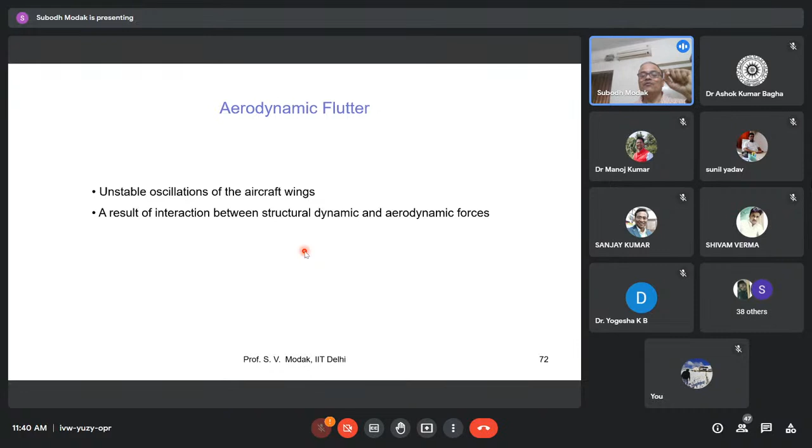That is why before an aircraft can be certified for normal usage, it is subjected to flight testing. This is done for any aircraft, civilian or military. Because when aircraft flies, the problem is that the damping level, the damping factor of the different modes, undergoes change. That is the issue.

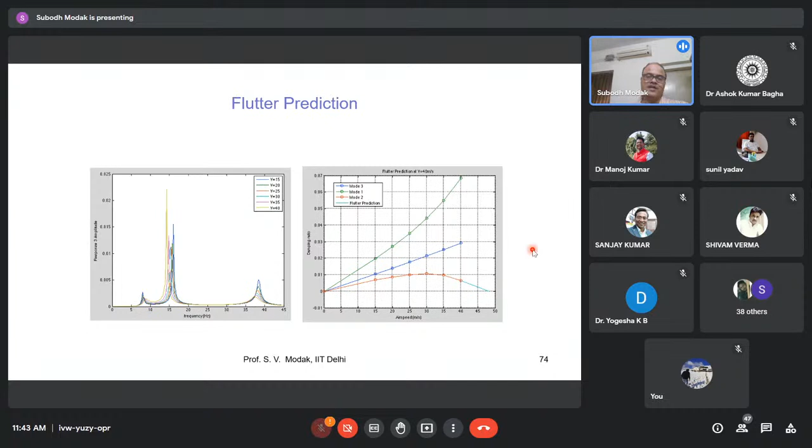That causes instability, and in this manner we try to determine the safe flying speed of an aircraft. Modal testing plays an important role here, because without it we would not be able to figure out the damping factors. Only through experimental testing are we able to know this. Therefore, flutter prediction is a very important application of modal testing in the aircraft industry, apart from ground vibration testing.

So I think we are coming to the end of the lecture. We have just a couple more slides.

Another application of modal testing, as I told you before, is that it provides an independent mathematical model. Because we are performing the test on the actual structure, if we take all precautions and ensure there are no errors in the testing, then the data we get from this test is very reliable and should be considered accurate, since it is actually done on the real structure. All boundary conditions and characteristics of the structure are taken care of automatically, and therefore this model can directly be used.

This model, obtained from modal testing, can be used for simulating the response of the structure to forces that might act on it in practice. For example, if we have developed a prototype for a vehicle like this, a company can perform a modal test on it.

What can they do? They can use this model to predict how a vehicle, if supposed to move on a rough road, would respond, and what kind of response the passenger would suffer. This can be predicted in advance by sitting in the laboratory of the company without actually running the vehicle. This is called response simulation, and it is possible not with a numerical model, but with a mathematical model derived from modal tests.

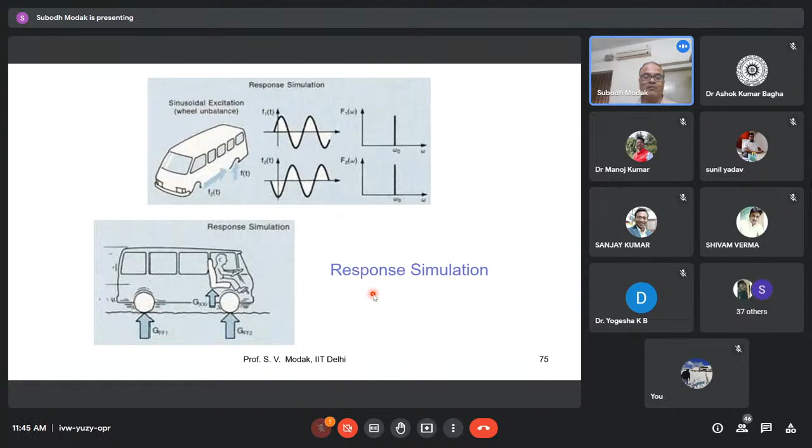This can be done. We can also assess the effects of structural modifications. For example, if we are interested to know - say, in this motor example shown here - what happens if we modify the structure by adding a spring, dashpot, damper or some mass, how would the dynamics of the structure alter? The dynamics would surely alter, but how?

The model we obtain from modal testing can be used to predict the changes which might occur. And what is the advantage of this? The advantage is that we can answer 'what if' questions - for instance, if a particular mode is resonating and I want to shift it, what do I have to do?

Let's say a particular mode is resonating, and to avoid resonance, if the operating frequency cannot be changed, the only way is by shifting the resonant frequency itself. So we might say, let me add some mass to the structure and see if I can shift this peak. All these questions - where to change, how much to change, and is the change effective - can be answered using this model.

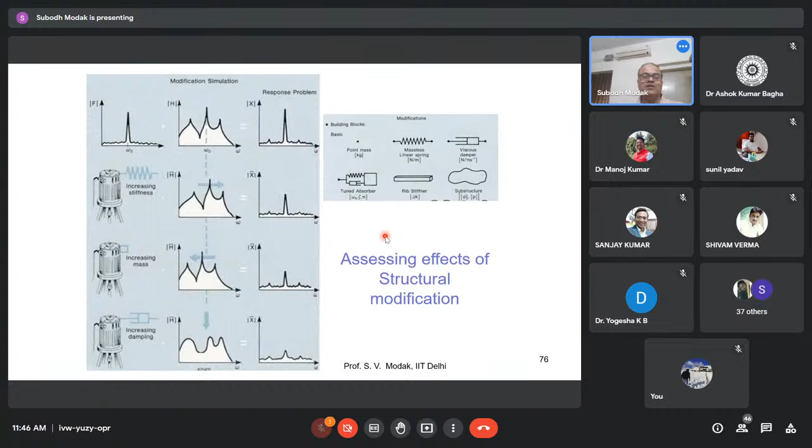So that is another important application - structural modification. We have also done studies on this in our laboratory, with our students.

This is one of the theses guided by an MTech student, where we studied whether we could predict stresses in structures using vibration measurement without using any numerical model. So we measured vibration on this structure. The idea was: if I just measure vibration on this, can I know what the stress is?

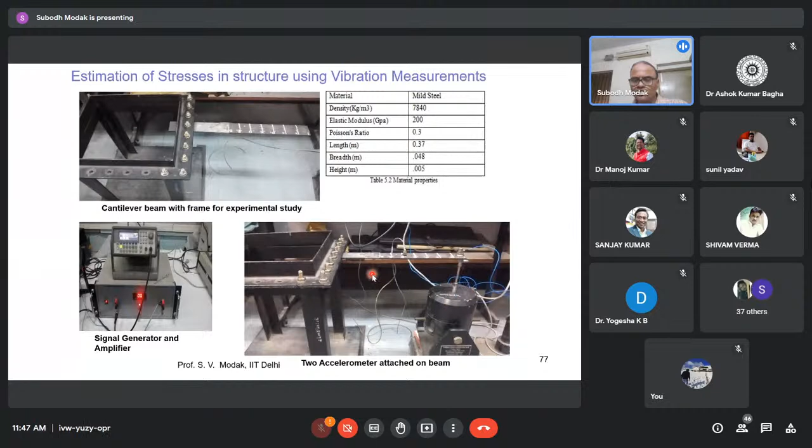That was the idea. What information on the structure was used? It was in the form of a modal test. So we performed a modal test on the structure, and based on the model, we tried to predict how much stress occurs when it is vibrating. We applied force using an exciter and measured the response using strain gauges to validate our methodology. We measured strain at different points using strain gauges, and also predicted the strain and stresses using our technique based on vibration measurement, and we got a good correlation.

You can see here the estimated stress using the methodology we developed, compared with the measured stress using strain gauges. In this thesis, we developed this methodology, and it shows that modal testing can also be used for strain and stress predictions.

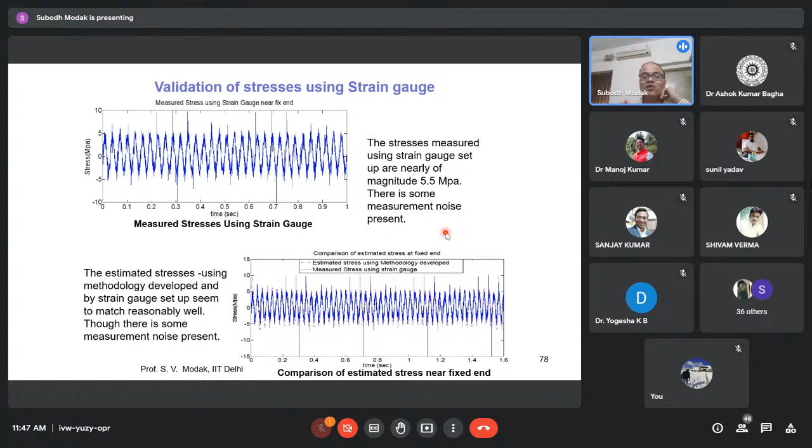This can be useful for condition monitoring, or monitoring stress levels in structures. The modal analysis, as I mentioned earlier, can also be done for acoustic systems. You can see this is one of the simple acoustic systems, or a cavity, we have in our laboratory. This is a rectangular cavity.

Remember, this modal test is not on a structure, it is inside the air medium. This air medium also has modes of oscillation, because it is surrounded by rigid boundaries, so the air makes a system in itself and undergoes oscillation. You can see some speakers mounted here. When we play the speaker, the air inside this box is excited and undergoes oscillation, just like any mechanical structural system.

We measured responses using microphones throughout this cavity, and then did a modal analysis based on those acoustic responses. These are the acoustic modes of vibration. This is the first acoustic mode, the longitudinal mode at 131 Hertz, where the air inside is oscillating in the longitudinal direction. This is the second mode.

Going back to the first mode, this green contour shows the acoustic pressure is zero, while the blue shows the acoustic pressure maximum on the positive side, and the red shows the acoustic pressure maximum on the negative side. This tells you a mode of vibration - this is a nodal plane, an acoustic nodal plane.

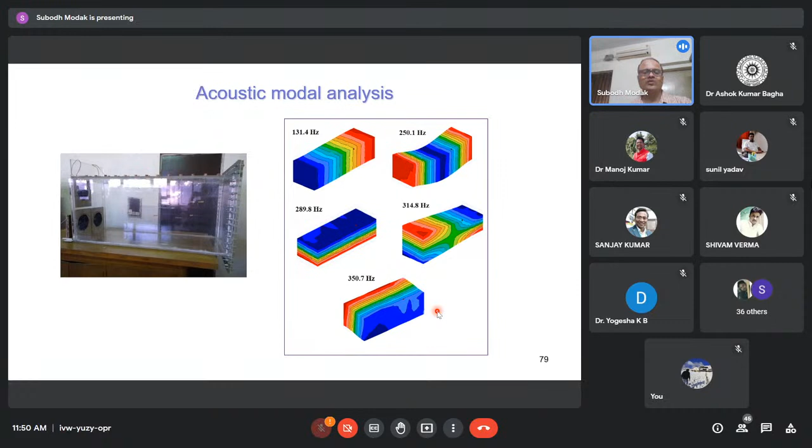We also developed methods for updating acoustic models and vibroacoustic models. In this laboratory cavity, we have the acoustic system and a flexible plate, making a vibroacoustic system. This plate can vibrate, and we have the air medium inside being excited - that is the acoustic system.

So you can see modal analysis is also done for acoustics and vibroacoustics problems.